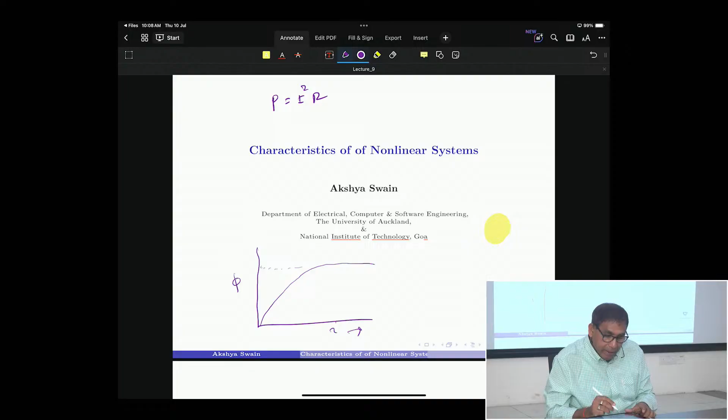Because if you operate within this zone, when the current is less than this, the system is linear. The moment you operate beyond that, then the nonlinearity sets in, right? So it all depends where your operating point is, how you are operating. That decides whether it will behave nonlinearly or linearly, right?

So the first point is important because academics see system is system. There is nothing like linear systems, nonlinear systems. It all depends on its behavior. Clear? Okay.

First point is your principle of superposition doesn't hold good, but with this constant, very standard questions we ask: y is equal to mx plus c. Y is equal to mx plus c. Linear or nonlinear?

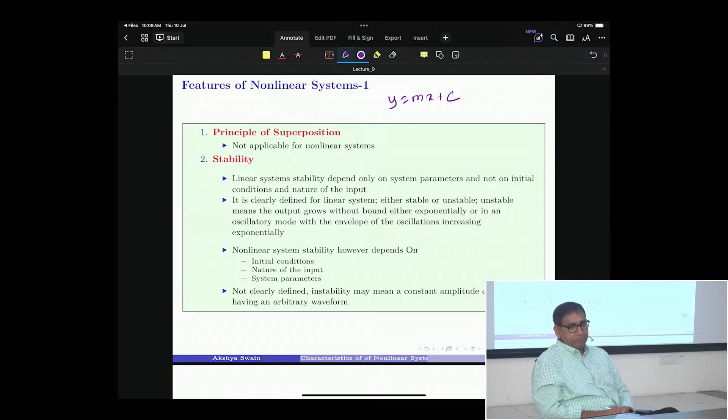Linear, right? Apply principle of superposition here. You apply principle of superposition here. For x1 it will give you y1 is equal to mx1 plus c. For x2, y2 is equal to mx2 plus c. Okay? Now x1 plus x2, what will it give?

Can you add them together? If you add them together, it will be m into x1 plus x2 plus 2c, right? Which is not equal to y1 plus y2. So the principle of superposition doesn't hold good for y equals mx plus c. Y equals mx plus c is not linear.

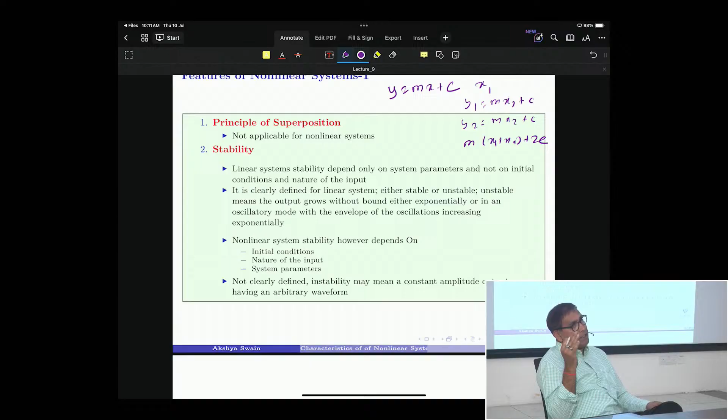It comes under the class of systems we will study tomorrow while dealing with the feedback linearizing controller, the affine class of systems. So mx plus c, remember, is a very standard academic question. Y equals mx plus c is non-linear, right? That is not important here.

Stability we will discuss in the next lecture, so I am not emphasizing it here. Linear system stability depends only on system parameters and not on initial conditions. But nonlinear system stability is different. We'll see that in the next lecture. Why waste time here? The important point is this point.

Point number 3 is the most important point, which is not being emphasized in the nonlinear literature. Energy transfer takes place at different frequencies, and that is a serious thing which I will tell you now. What is the meaning of that? The meaning is here, you see.

This is a square law nonlinearity, see here. You apply an input of sine omega t. The output will be a DC component and a 2 omega component. Do you see it? If you apply sine omega t here, there is a square law, so y(t) equals u squared(t), that equals a squared sine squared omega t, which equals a squared by 2 times 1 minus cosine 2 omega t. What is the frequency of that component, y(t)? One DC component and one 2 omega component. Do you understand that?

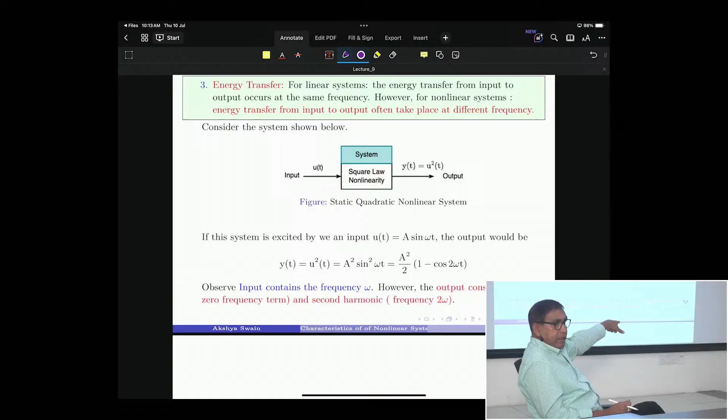See here, this term has a squared by 2 into 1 minus cosine 2 omega t. What are the frequencies? One is constant, the other is 2 omega, right? 0 and 2 omega. What is the input frequency? Input frequency is omega. The output frequencies are 0 and 2 omega. Square law, right? So energy transfer takes place at a different frequency.

What is the meaning of that? If it's a linear system, I will elaborate this point shortly. If it's a linear system, you apply A sin omega t, you will get some magnitude, doesn't matter, B sin omega t plus or minus phi. If omega is the input, you will get omega out, right? Nonlinear systems, no. Nonlinear systems, you apply omega, you may get a different frequency component, depending on the nature of the nonlinearity, right?

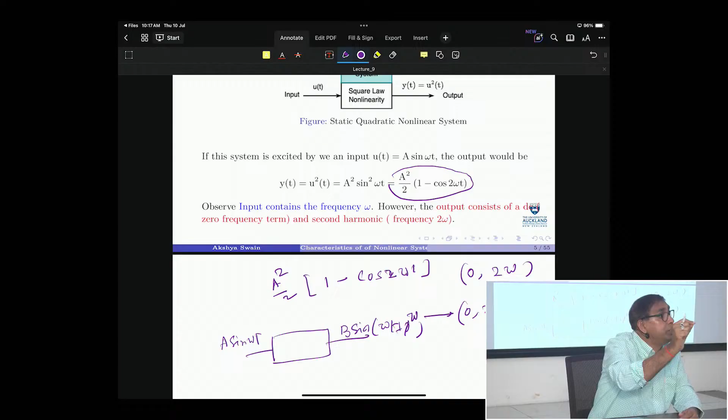So usually you will find, if people are working on motor control, see here, like this. Suppose there is a cascade system, this is one system here, this is another system, system 2, and this is another system, system 3.

I'm just giving an example. This example is very important. Suppose you know the resonant frequency of this one, this one, and this one. If you know the resonant frequency, what will you do? You will not excite the system at that frequency, right? Clear?

Now the problem is you do not know which type of nonlinear element is there in those systems. Suppose the resonant frequency here is omega 1, here it is omega 2, and here it is omega 3. I know it, so what I will do is not apply any input having frequency omega 1, omega 2, or omega 3. So I apply a signal of frequency omega 4. If I apply a signal of omega 4, it does not coincide, it will not resonate, clear?

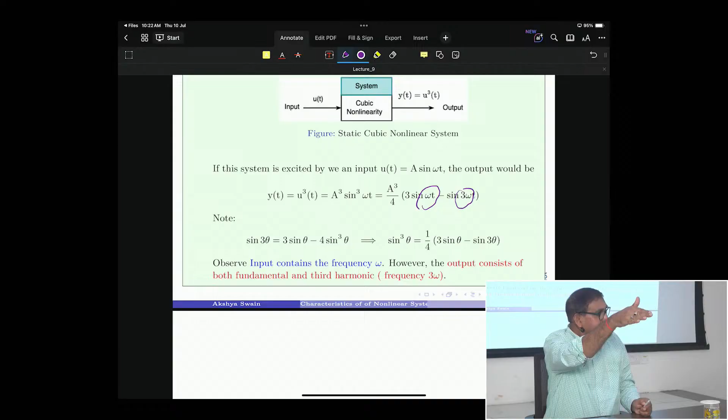I give an example. In Odisha, there is a Paradip port. So the question came in a school examination: which day does Independence Day come? One student wrote August 15th, 15th in Odia is Pandar, so he wrote August Pandar, meaning 15. Another student copied it, but Pandar is not a term, he heard Pandar as Bandar, meaning port, so he wrote your Independence Day is August Bandar. The third person said, how can August be Bandar? It is Paradip Bandar, so now Independence Day is Paradip Bandar. You got the point? How energy transfer takes place at different frequency and it changes.

This is a typical characteristic of the system, and you must be very careful about these things.

Interchanging the cascading elements: in linear systems, if there is a cascading connection, you can interchange G1, G2 to G2, G1. But this is not the case with a nonlinear system, you cannot just interchange this to that. Okay, this is not very important, but I will tell you.

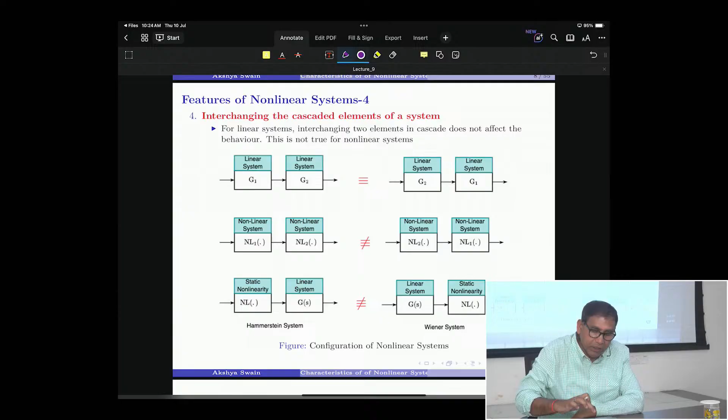Number 5 we will discuss after some time.

Multiple isolated equilibrium points, I will discuss in today's lecture. A nonlinear system, linear system has got only one equilibrium point. Remember, linear systems, no matter how complex, has got only one equilibrium point. Linear systems cannot have multiple equilibrium points.

Nonlinear systems can have multiple equilibrium points. Not that it always has multiple equilibrium points, but it can have multiple isolated equilibrium points. A nonlinear system can have more than one isolated equilibrium point. I am not saying that nonlinear systems have multiple equilibrium points - they can have. There are nonlinear systems which have only one equilibrium point, but most nonlinear systems have multiple equilibrium points. I will tell you what happens to these things later on, today itself.

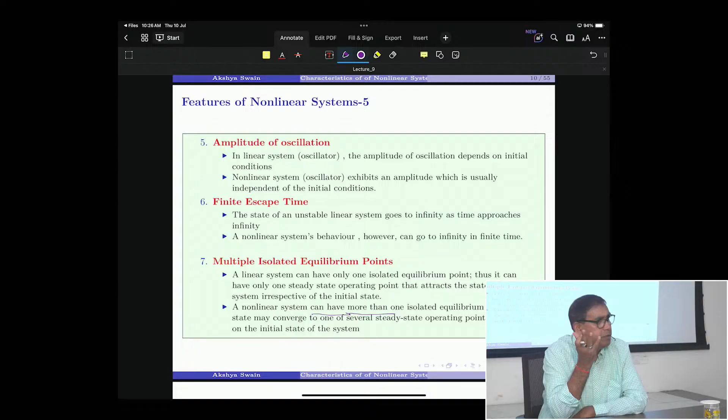Finite escape time means it can go to infinity within finite time, whereas linear systems will go to infinity in infinite time, but that has no real meaning. That point is an academic discussion, because infinity is the 5 time constants I told you - engineering infinity. So, multiple isolated equilibrium points: linear systems have one equilibrium point, and nonlinear systems can have multiple equilibrium points.

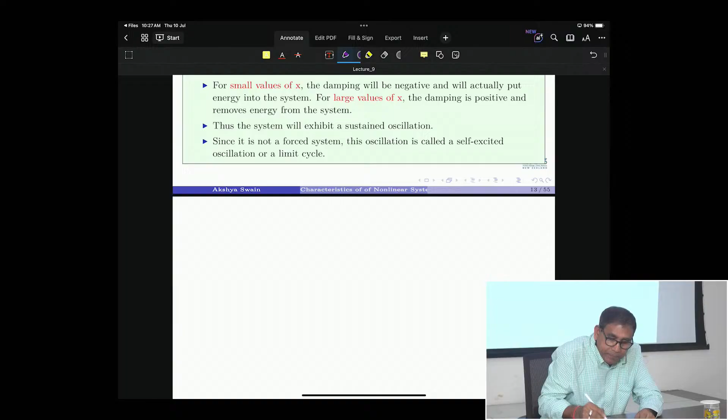Limit cycle oscillation - this is important. Let us first understand why oscillations occur. Unless that understanding is clear, you cannot understand anything. Why do oscillations occur? Remember, for oscillations to occur, no matter the linear system or any system, there must be exchange of energy. There must be exchange of energy for oscillations to occur.

This is an LC circuit. Now, if you inject certain amount of energy either to the capacitor or to the inductor, and leave it free - there is no input here, no voltage applied, just an impulse input injecting some energy, and leave it - there is no resistance here, so what will happen? The magnetic energy stored in the magnetic field of the inductor will be transferred to the capacitor's electric field, and because there is no loss, no resistance, it will again transfer to the inductor. This continues.

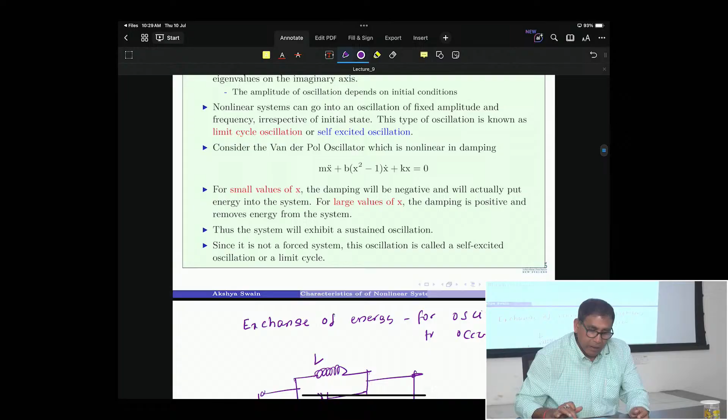Limit cycle oscillations - this oscillation is a bit different. To understand oscillations, I will tell you one thing which I tell in a different context. But this is India, I can utter these words here because you can understand - a typical example of oscillations: friendship.

Who can become good friends? Chanakya has told these things, and it is exactly equal to oscillations here. There are 6 characteristics. First is dodate pratighunnati: two people will be friends if you give something and he also gives something - you give him a present or gift on his birthday, and he also gives you a present. That is exchange - I give, you give. Second, guhyamakhyati puchyati: you tell your secret to him and he also shares his secret - then only you can become friends. Not that you tell your secret and he says nothing - friendship will not last. Third, bhukte bhojayate chaiva: you ask him to a restaurant for dinner and he also calls you for dinner - you treat him, he treats you. These 6 characteristics are a clear example of exchange - you exchange.

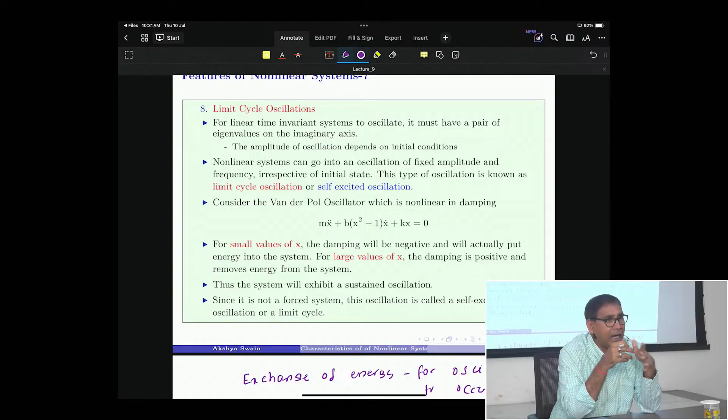Now first let us see what is happening, then I will come back again. Dampers - damper windings, dampers in vehicles. Suppose you drive in a good car versus a low variety car, you feel not comfortable. Why is that? Because the spring and damper are not of good quality, so damping is there. Now let us see this equation first.

M x double dot plus b times (x square minus 1) times x dot plus kx equals 0. Let us see this equation, then discuss all these things. What is damping? The usual equation is m x double dot plus b x dot plus kx equals 0. The coefficient of x dot is the damping term - here it is b. In our equation, the coefficient of x dot is b times (x square minus 1). So damping usually takes out energy - it takes out energy.

Now suppose x, the displacement, is less than 1. What will happen? X square minus 1 is negative, so that means negative damping. If x is less than 1, b into x square minus 1 is less than 0, right? Damping is negative. Usually damping is positive, but here instead of taking out energy, it will put energy into the system.

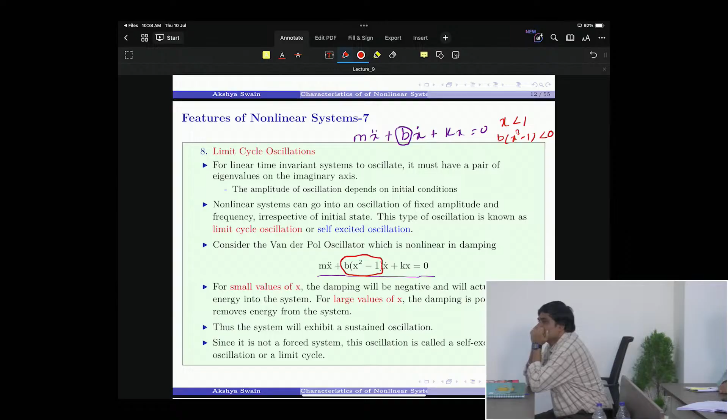It will put energy into the system. So the moment energy is put into the system, the amplitude of oscillation, the displacement, will increase. Now once it increases beyond 1, it becomes positive, so it will start taking out the energy. So sometimes you put energy in, and x increases, then after it increases, it takes out energy. So over a particular period, sometimes it is positive, sometimes it is negative.

So the effective damping will be 0. Let me tell you, what is the damping here? LC circuit, what is the damping? Damping is provided by resistance. Is there any resistance here? Damping is equal to 0, system oscillates.

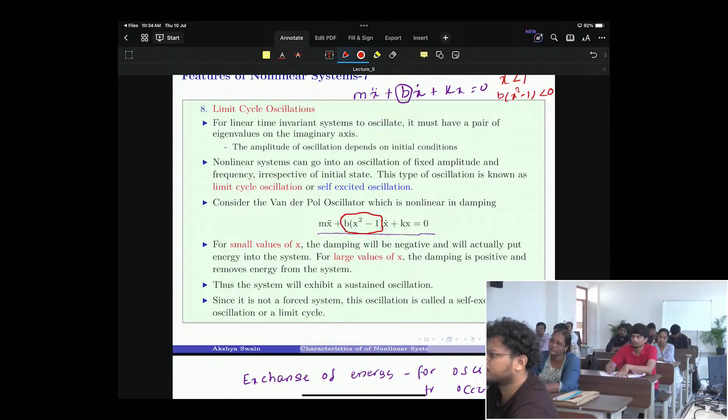Now here, things are different. Sometimes the damping is positive, sometimes the damping is negative, but the effective damping is 0. So it will oscillate. But that's the difference. Damping is 0 gives pure oscillations. Effective damping is 0 gives limit cycle oscillations.

Why that difference? Consider this: you do not earn any money, you do not spend, your bank balance is 0. Case number 1. But another case: you earn 1 lakh and also spend 1 lakh, and your bank balance is also 0. From a bank balance perspective, a person who doesn't earn anything has bank balance 0. Another person earns 1 lakh, spends 1 lakh, his bank balance is also 0.

These two people are the same from a balance perspective, but one is a beggar, another is a scoundrel who doesn't know how to manage his finances. Two things are completely different. Limit cycle oscillation is like that: effective damping is 0, effective saving is 0, but here saving is actually 0.

And another thing: is there an input in this equation? M x double dot plus b times x square minus 1 times x dot plus k x equals 0. There is no input. It's self-excited.

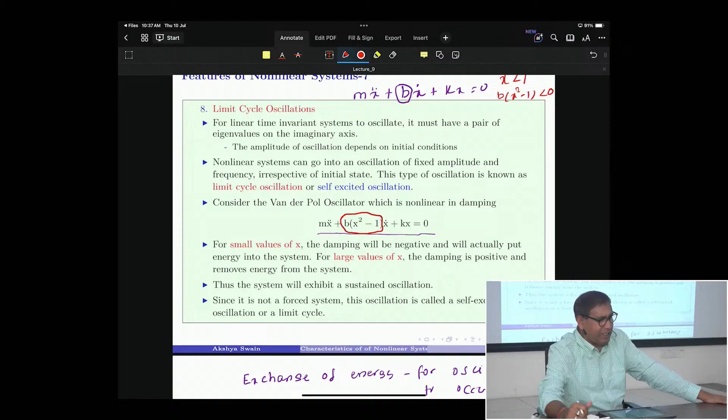With different types of dress, a hippie type of dress, he would just be talking to himself. Just talking. Self-excited oscillations, nobody is there. It would be around 4 o'clock or 3:30, I usually leave the university at that time, and he would be talking. I always give this example to students. I told her I parked my car on Mount Eden Road and I found a person on Kid Street coming and talking like this.

Self-excited oscillations, like limit cycle oscillations, got the point? So limit cycle oscillation is a very important phenomenon, and it occurs in nonlinear systems. The characteristic is it is self-excited, no input is necessary. First point: no input necessary for the oscillations. Second point: the effective damping is 0, sometimes damping is positive, sometimes damping is negative.

Clear? Very important phenomenon, limit cycle oscillations, and it's different from common oscillations in linear systems. An LC circuit also oscillates, but that's different, we'll see that today itself. No, you cannot say that directly, we have to determine it by different ways. There are standard ways you can determine it; otherwise analytically you cannot determine the frequency of oscillations. We'll come to that point and see how it works. Chaos.

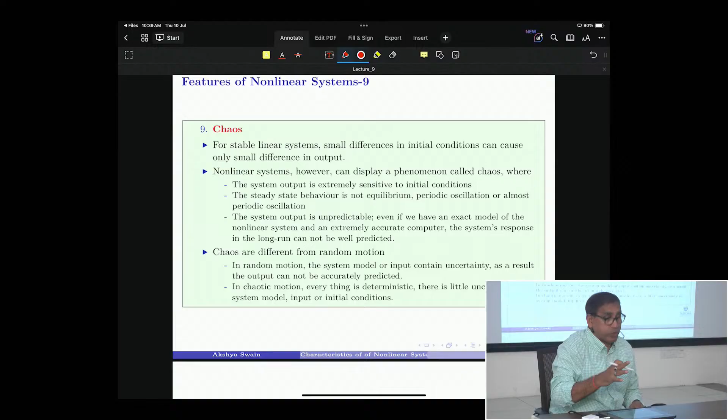Chaos. If this is the nonlinear system space, the entire system space is nonlinear, chaotic systems will be this much - a very small percentage of nonlinear systems behave chaotic. Very common thing. We have seen it with PhD students. You ask them to perform an experiment, and they will get some results and they will come to you.

One of my students, Leron, was working on mechanical engineering, he is now in Melbourne. Leron was working on some rotary inverted pendulum. One day he came to me and said, Dr. Swain, I think my system is chaotic. I looked at him, what are you saying, Leron? How do you know it is chaotic? He said, the response is looking such, it is chaotic.

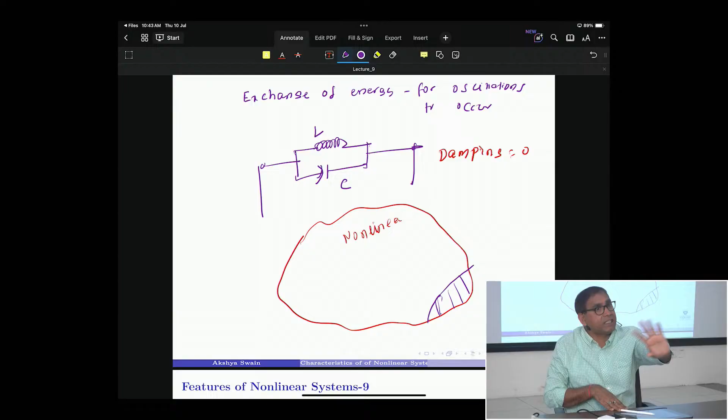Next day morning, you started doing it, you execute it. I am an onlooker, I am outside, so I will say, what is up? That is chaos. Appears to be random, but completely deterministic - who is going to do what has been planned before. He is not going to push the door, you will do it. All the tasks have been assigned. So I say a chaotic system, that's the order in chaos.

Order, got my point? That's the order in chaos. There is an order. So the student says it appears to be random - no, first find the order. Chaotic systems, and always remember, chaotic systems are not random systems. It appears to be random, it is not random, it is completely deterministic. You can determine everything. Random phenomena you cannot determine. So chaotic systems are a bit different, it's a serious thing. Appears to be random, but completely deterministic, that's the order in the chaos.

Another characteristic is extremely sensitive to initial conditions. Got a point? A slight change, a very minute change - we call it the butterfly effect, I am not explaining that in detail. It's a minute change, the example given is the butterfly effect: that is in the Amazon belt, if a butterfly affects the wing velocity, that will cause a storm in the Indian Ocean. Extremely sensitive to initial conditions, right?

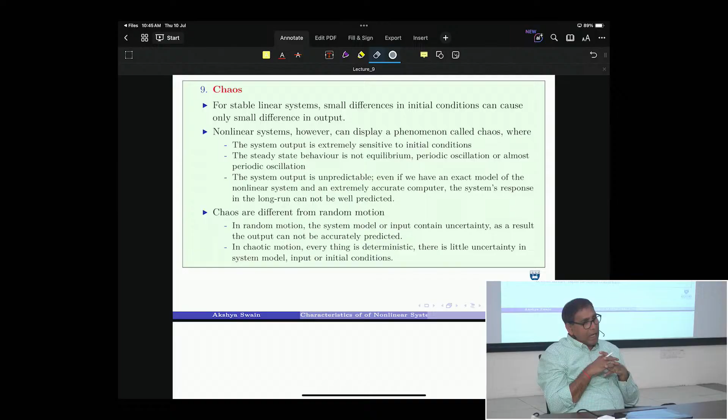But the important point is, chaotic systems appear to be random, but it is deterministic. Another thing is long-term prediction is not possible. It is deterministic - what is deterministic? The system whose behavior can be predicted precisely, that is a deterministic system. A random system, you cannot. Here prediction is possible, no doubt about that, but long-term prediction is not possible. I'll give an example here. Long-term prediction is not possible, short-term prediction is possible.

Weather forecast, that model is chaotic. Short-term prediction is possible. Suppose I predict tomorrow's weather, it will be correct. Day after tomorrow, a little wrong. Still a day after, it will be almost wrong, right? So long-term prediction is not possible, short-term prediction is possible, because the model is chaotic.

Another point which we are not discussing here: chaotic systems require a little bit of different mathematics. One is fractal geometry. Have you heard the term fractal geometry? Yeah, Mandelbrot said, fractal geometry.

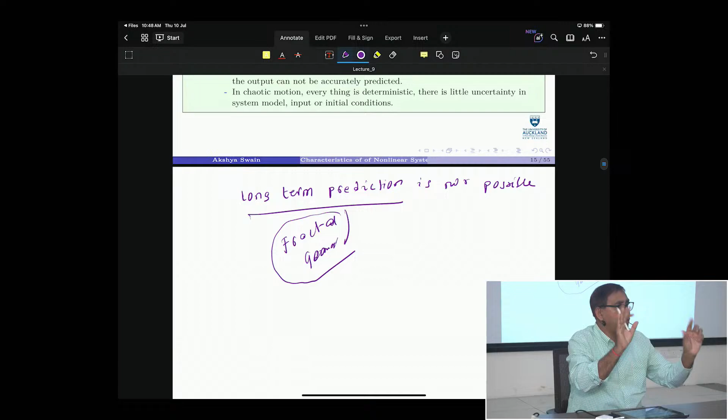I am just giving one example here. Suppose I have a piece of paper. What is the dimension? 2. Now I make holes on the paper, a few holes. What is the dimension? Still 2, same. So a paper without any hole and a paper with some holes are the same? They are not the same. So how do we distinguish this paper from that paper? Euclidean dimension cannot do it. So we have to calculate some fractal dimensions.

Say, for example, bread. You get different types of breads, right? So when these breads are produced, you can calculate the fractal dimensions of different breads. Then you will find which breads have lots of porous things in them, right? So fractal dimension will distinguish these things. I'll show you something today itself. So fractal geometry is being used to characterize some of the chaotic attractors.

Important point to take before I proceed further: multiple isolated equilibrium points, energy transport takes place at different frequencies, limit cycle oscillations, and chaos. Let's go further.

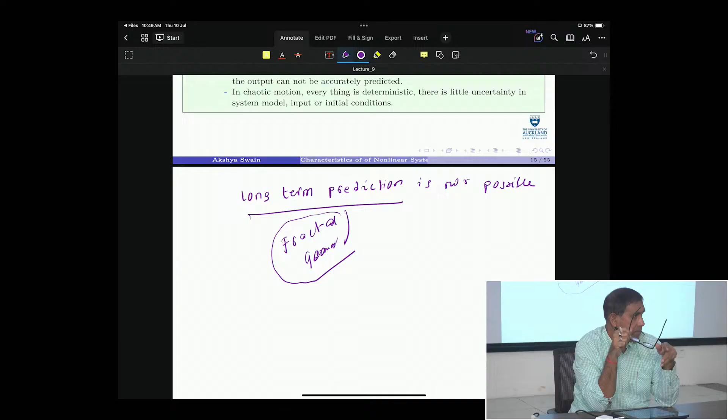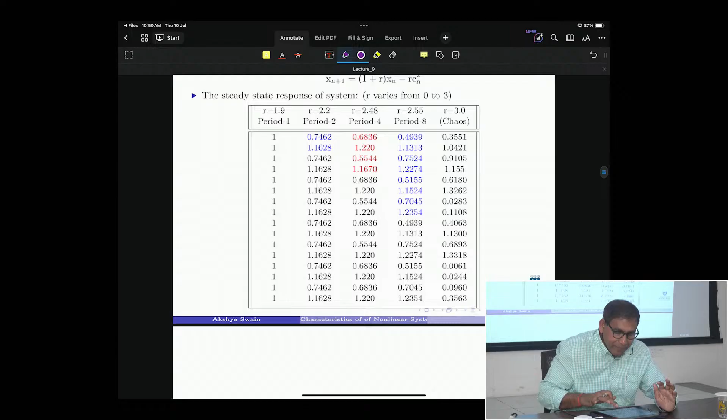Let me show you. See this equation, if this parameter R I am changing, just see the table. If R is equal to 1.9, the output is always 1, 1, 1, 1, 1, right? There is only a steady state value of 1.

The moment R changes to 2.2, now see how it looks: 0.7462, 1.1628, again 0.7462, 1.1628, again 0.7462, 1.162. So it is in steady state, but with two steady states, right? 0.7, 1.16, 0.7, 1.16, 0.7, 1.16. Period doubling bifurcation, that means two equilibrium points.

Now if R changes to 2.48, this pattern repeats again, you see. It repeats again. Got my point? Period 4 bifurcations. So it goes to those, it is not transient, it repeats at certain points.

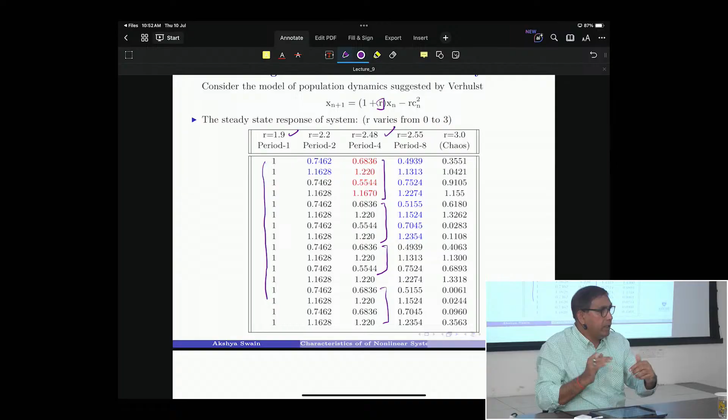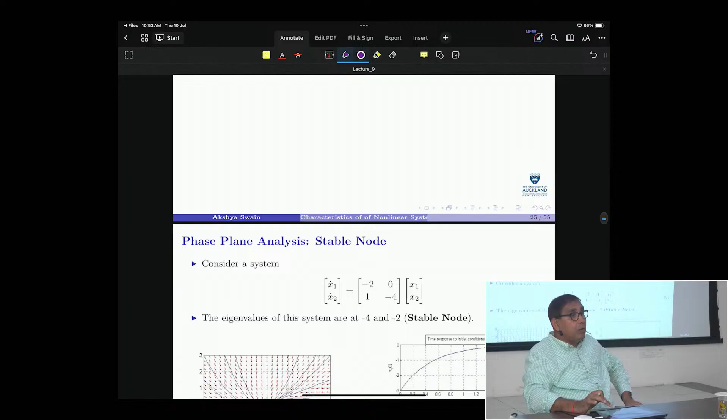How to analyze nonlinear systems? There are different methods to analyze. One of them is the phase plane method, which I am going to show you now. That particular method is only applicable for analyzing second order nonlinear systems, because it is a phase plane method. Plane means 2 dimension, it cannot be more than 2 dimensions.

So you take a nonlinear system, any second order system. How many state variables will there be? Two. So you just plot those, you get the response, you plot between x1 and x2, and see how it behaves, right?

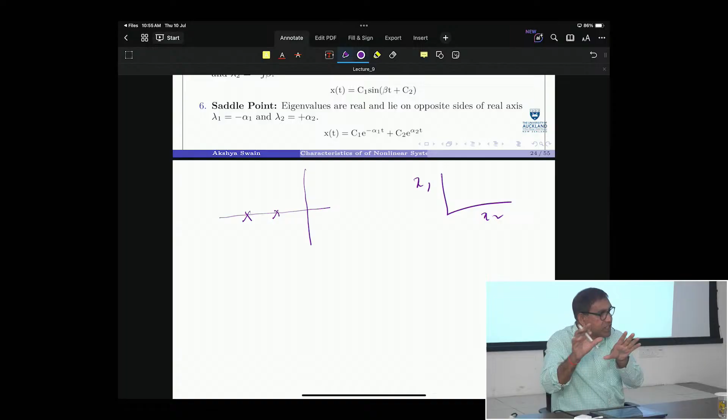For a linear second order system, if the poles are here on the real axis, and if you plot the phase plot, meaning you plot x1 versus x2 - not a time plot, remember, not a time plot. You get x1 versus time, x2 versus time, but instead you give the command to plot x2, x1, no time. Then you will find in the x1-x2 plane, or x2-x1 plane, it doesn't matter, it looks like this.

Depending on the initial conditions, the plot will look like this. So you take a nonlinear system, get the response using ODE45, and plot it. If it is like this, that means the system is stable, right?

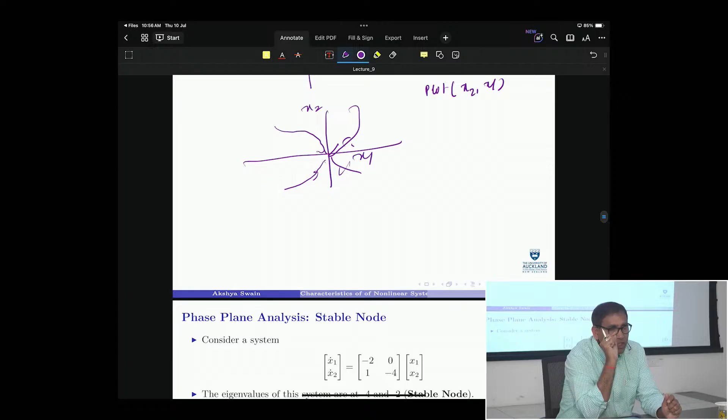If the system has got complex conjugate eigenvalues - this is one of the important points - the phase plane portrait looks like this.

No, you're not getting it. Just bear with me. You have got a nonlinear system, you want to analyze its behavior, right? So what you do, you go to the computer, you get the response x1, x2. You get x1 versus time, x2 versus time, but don't plot x1 versus time and x2 versus time separately. You get x1 and x2, then plot x1 versus x2, right?

If the system has poles in the complex conjugate negative plane, the phase plane portrait looks like this. Unless you know from a known thing, how can you interpret it? I will show you - this is a phase plane portrait. Suppose somebody shows me this, then I will say it is a damped oscillatory system. The oscillation amplitude is gradually coming down, finally becoming zero.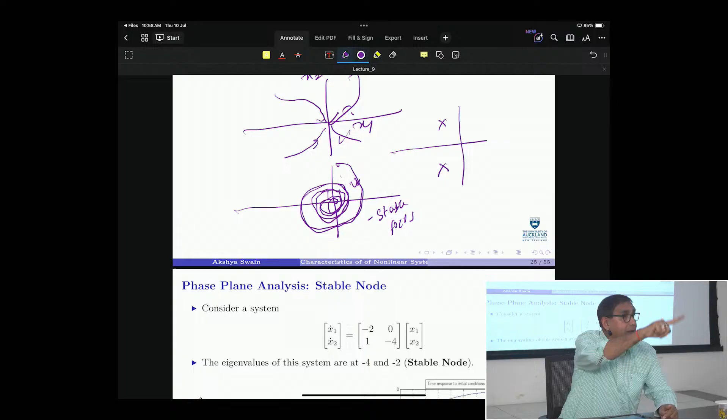Just like you must know how a good person behaves, how a bad person behaves, how a criminal behaves, right? If you know it, then I will show you the behavior of this system - a person looks like this, then you know this matches with an idiot, so that person is idiot. Similarly, if there is a complex conjugate eigenvalue, the phase plane portrait is a spiral, a decreasing spiral.

I understand, I understand, I got your point, very good question. This is the system, a linear system. Now here also, if you plot the phase plane portrait, it will look like this, right?

Another system, it is here, right? Here also it will look like this, but how do you know the difference? You see, it is coming down, coming down, coming down, right? So it will quickly come down. Many spirals - what happened? From that you can know it.

Whether damping is more or less. Damping is more means away from the imaginary axis, sigma. Damping is less means closer, right? So from that you can know. This one is just decreasing.

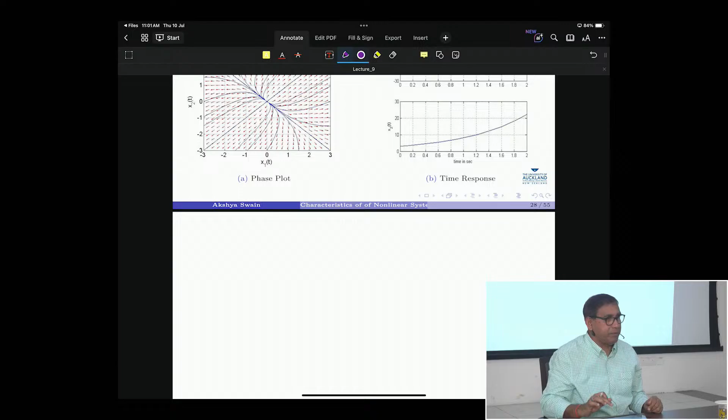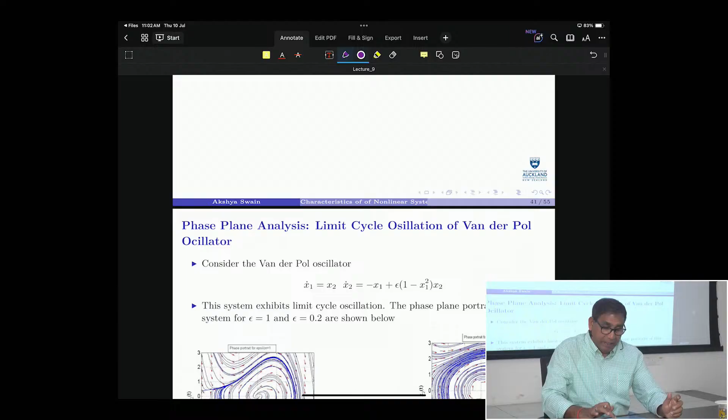Now, saddle point. Saddle point means one side is positive, another side negative, so it's unstable. This point is important. Now see the difference - this is the Van der Pol oscillator.

This system exhibits limit cycle oscillations, right? Any oscillation means a closed curve. Now see the closed curve here - it is not circular, is it? This is some different shape, right? So it is a limit cycle oscillation.

And another point is, isolated closed curve is a limit cycle. What is the meaning of isolated? Isolated means if there are poles here, then in the phase plane portrait, for a particular initial condition, you simulate it with some initial conditions, you will get this one, right?

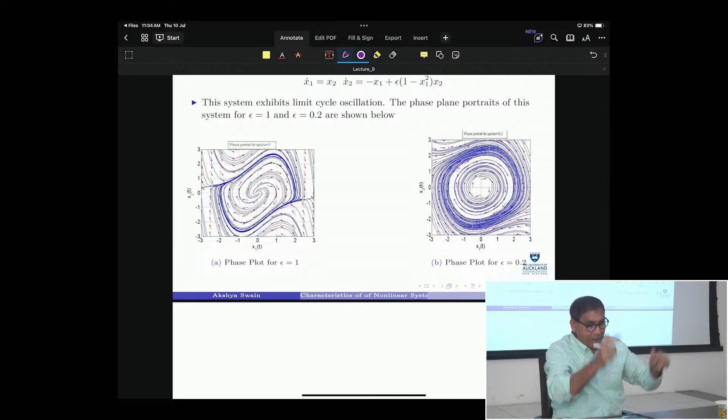You change the initial conditions a little higher, you will get another circle like this. You change the initial conditions to another value, you will get another circle, right? So these circles are not isolated - by changing the initial conditions, you get different circles. Whereas here, by changing the initial condition, no matter what you do, there is only one circle. You see, I'm drawing it here.

You start from this point, you come here. You start from this point, you change the initial conditions, you start from this point - it will not intersect, but I'm just showing here - it will again come to the same point. You start from this point, again it will come to this point. Not isolated - this is isolated. It's not closed, right? Only one closed curve in the phase plane portrait, right?

11.5, I will take only 5 minutes to talk about the basin of attraction, then I will leave.

Analysis part - see here, the interesting thing. Nonlinear systems, this is a very interesting phenomenon - nonlinear systems can have multiple isolated equilibrium points, right? If a system has got multiple isolated equilibrium points, where will it converge, where will it go? Because with equilibrium points, if you have got 3 houses - one is Panaji, another is near the airport, and another is in the NIT campus - if you have got one house, then you can come to that house only. If you have got multiple houses, where will you go? This particular system has got 3 equilibrium points. Okay, I will explain this diagram.

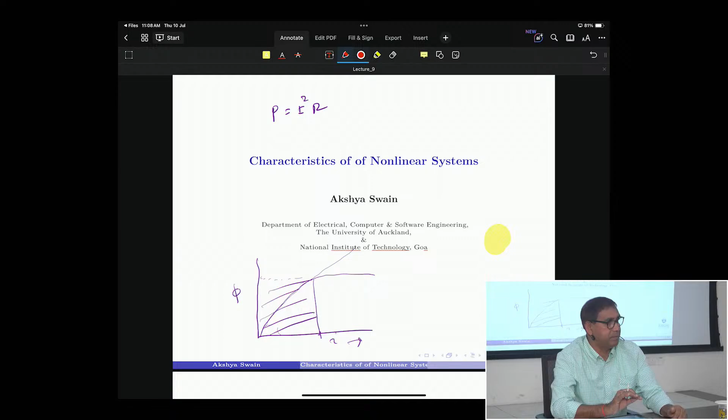So in chaotic systems, when you analyze, we always calculate the basin of attraction. It has to be done numerically, not analytically - it's difficult. Okay, it's not difficult. You see, I have calculated these things. I don't know whether I've given the program to you, but if it's there, I can pass it to you. I'm showing you the basin of attraction here. You see, just a minute - here, see, basin of attraction.

2 pi 0 minus 2 pi 0, you see, I've done it, this is 0, 0, minus 2 pi 0, plus 2 pi 0.

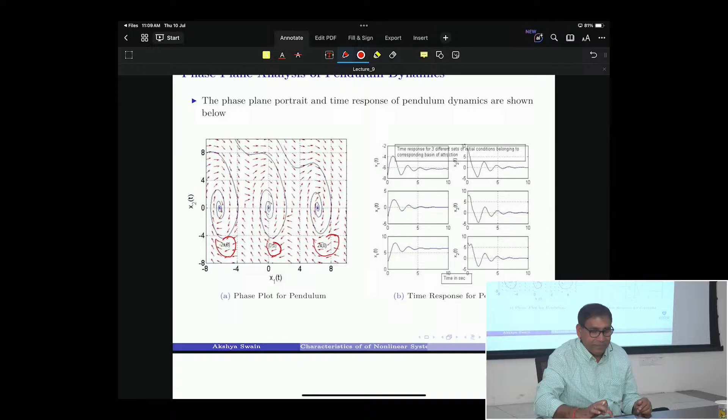But that is not the point. The question is basin of attraction. If it operates in this zone, it will be attracted to that. If it operates in this zone, it will go here. If it operates in this zone, it will go there. Basin of attraction is extremely important. It has to be done numerically, not analytically. You have to find out the basin of attraction.

These things I did 20 years back on my computer. I did not take all the initial conditions, I took some initial conditions. It took 2-3 hours on my computer during that time. It takes time, but for each initial condition I will spread and find out where it is going. Otherwise we can find out. So this is because of that.

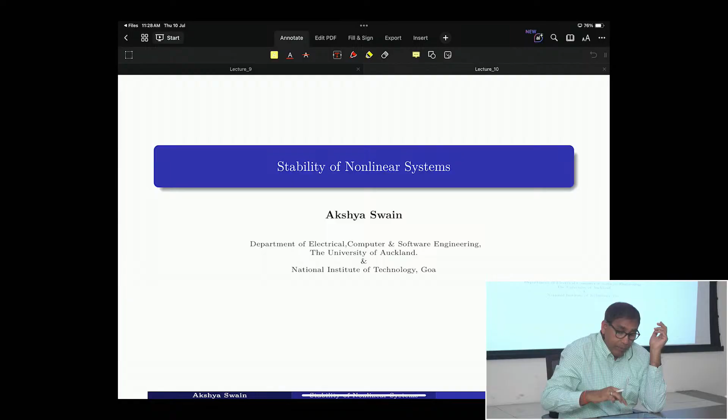Got the point? These diagrams you all know, so I'm just doing it for completeness. This is asymptotically stable. This is unstable. This is Lyapunov stable or neutrally stable - if you just give the perturbation, it will go nearby and stay there, it will neither diverge nor converge.

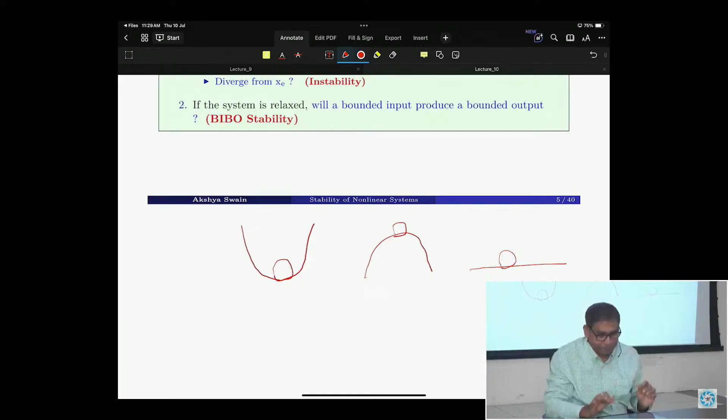How to study the stability of a linear system? A linear system has got only one equilibrium point. And that is stable if all the eigenvalues are in the left half plane. Left half plane poles, system is stable. Right half plane poles, system is unstable. Imaginary axis poles, marginally stable, actually unstable.

Marginally stable is an academic thing, an academic job. There's no marginal stability in practice. Nobody will put you on the cliff of a mountain and say you are marginally stable there. No, no, no, that is practically unstable. So we say practically marginal stability does not exist. We cannot take the risk of asking people to stand on the cliff because you are marginally stable. If something happens a little bit, you are gone.

So system is stable or unstable. Left half of the S-plane, system is stable; right half of the S-plane, system is unstable. Now the question is how to study the stability of a nonlinear system.

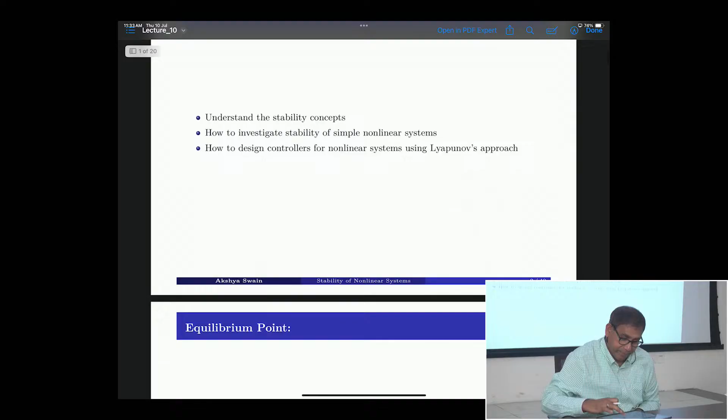See, why? One minute, where did it go? Which lecture is this? Lecture 12, 11, no? 11, no, lecture 10. Okay. Wait, is it coming? Yes. And compute the eigenvalues of the Jacobian. What is happening here? One minute, let me open it in PDF Expert.

Compute the eigenvalues of the Jacobian. Then if the eigenvalues are on the left half of the S-plane, the system is stable. Right half of the S-plane, the system is unstable. That is what people do in this analysis.

You may laugh. The system is nonlinear and people are using this linear analysis. At each equilibrium point they find the Jacobian, they linearize the system, then develop the controller. Does it have any basis? Is there any justification to do this? The answer is yes. What they are saying, they are not fools. They cannot be very genius, but they are not fools. It has all come from Lyapunov's theory.

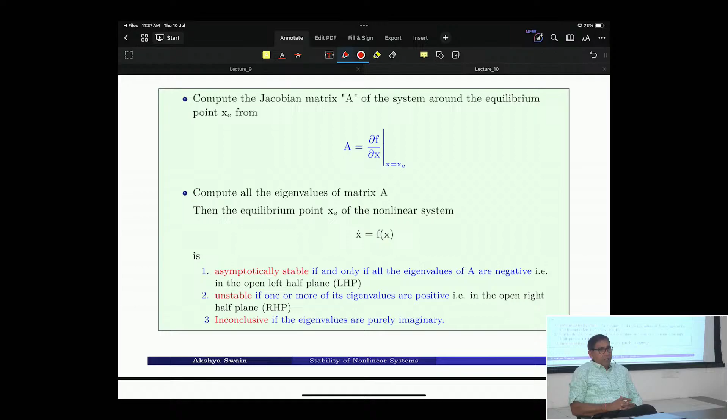This one, you perturb it, it will finally come to this point, right? Say for example, if I draw like this, if you are here, and you go and go and go and finally you will come again to this point. Okay? When I was a student, in class 8, there was a poem, I didn't find out actually now, that poem's name is The Quest.

I always give this example to explain asymptotic stability, The Quest. This poem was taught to us in class 8. I will tell you what it is. There is a mother and son, father is not there. They were living in a very nice house near the Miramar beach, in Goa, Panji. Very nice place. They were staying together, the mother and son.

Then one day the son told his mother, Mom, I don't want to live here, I am getting bored - very common term nowadays with youngsters. We are bored, what is this bloody boredness, I don't understand. Anyhow, the mother told, why are we bored, this is a very nice beach. No, I want to go and find a house, a quest. Then the mother finally said, okay, you go and find a house, then we will shift there, right?

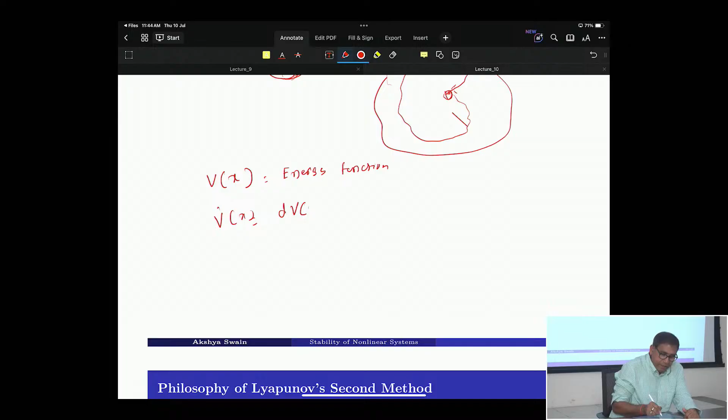Find V dot x. V dot x is the differentiation with respect to time. That is dVx over dx into dx over dt. That is equal to dVx over dx into x dot. Find V dot x. Get the energy function and differentiate it.

If it is negative, system is stable, asymptotically stable. If V dot x is less than 0, system is stable. V dot x is less than or equal to 0. If the equal to 0 is there, the system is Lyapunov stable, that is, it is not asymptotically stable.

So for that analogy I gave you, it is not coming to Miramar beach, it is going to nearby another beach. It is remaining close, it is not going out of this space. System is Lyapunov stable.

So you take a function Vx, differentiate the function and see whether it is negative. If it is negative, system is stable.

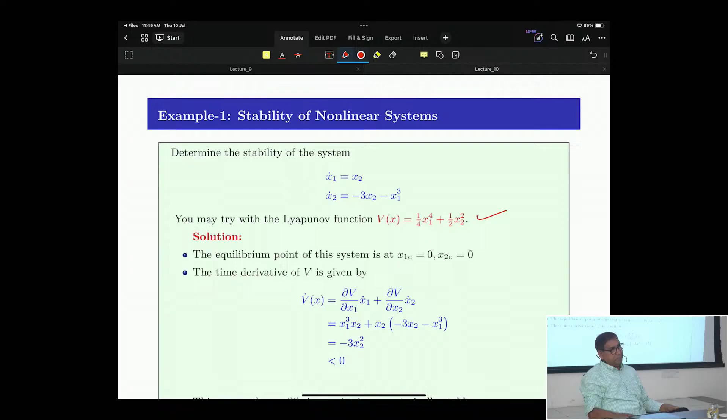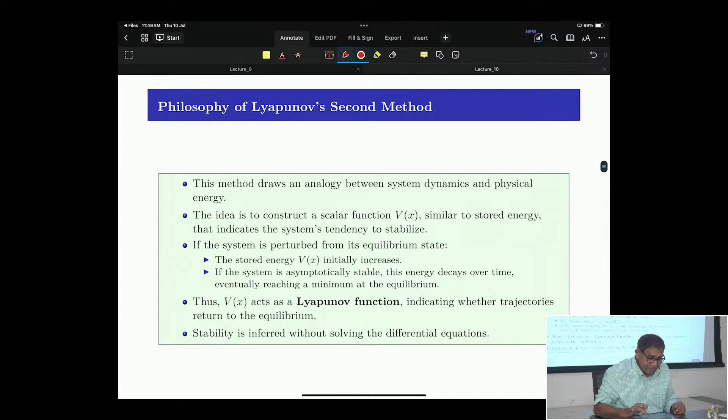Now, there is a catch here. What is the catch? You take a Lyapunov function, you differentiate it, then you check the sign of that function, whether it is less than 0 or it is not, right? Now, what do you check? You check V dot x is less than 0 or not. How to check it?

Simple system, you can check it. It's an inequality, not an equality. V dot x should be checked for negative definiteness, negative or 0, right? So you have to solve an inequality. V dot x is less than 0. How many solutions are there?

There are many solutions. Suppose I say find the value of x which is less than 5. How many solutions are there? Tell me. Infinite number of solutions, there are many, right?

Now, when there are many solutions, you have to find out the feasible solution. LMI feasibility, feasible solutions. I'll give the feasible solutions.

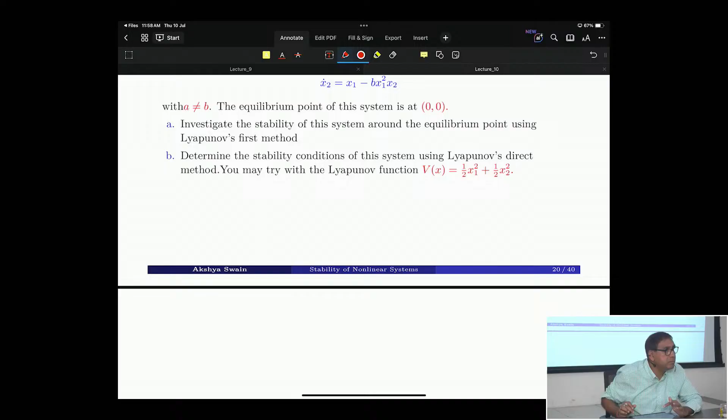No, the first method, you can always use the first method. You linearize the system, you find the Jacobian, then you find the eigenvalues. If the eigenvalues are in the left half of the S-plane, the system is stable, there is no need of finding Vx.

If the eigenvalues are on the j omega axis, then you have to resort to this particular formula. Good question.

I will not start with the first method. Those who are not control specialists should start with the first method, because you linearize the system and do it. Okay? Linearize the system and do it. Linearization of a system, which we will talk about tomorrow, the feasibility.

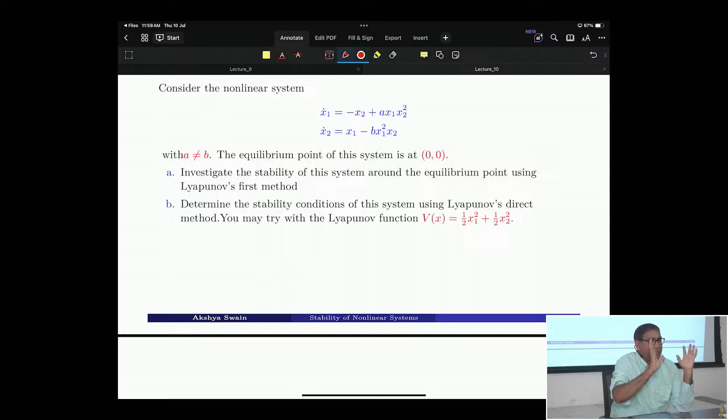Linearization, Jacobian linearization, this is just like our Indian government is working. Appeasement. Not only Indian government, throughout the world, appeasement politics. A person is an idiot, and instead of telling him he is an idiot or throwing him out, you tell him to behave a little bit, be within a certain range, you stay here. Okay?

But feedback linearization, and other types of techniques, whether it is linear or non-linear, remove it, completely remove it from the system. So Jacobian linearization is okay, no doubt about that. Now see here, I'm saying this example.

This example, is it? Now this example, I'm just showing the result.

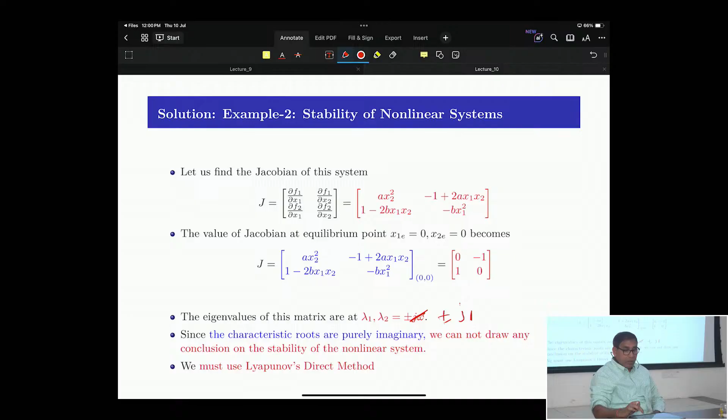This one is plus minus J1, not J0, that's a typo. Now here, this particular system, I found using the usual first method. I got the Jacobian, I got the eigenvalues of the system, and the system eigenvalues are plus minus J1. So now I cannot use the first method. So we use the other method.

And then we found out, okay, actually this particular line is also wrong. I just show it for the students, I do it, I should remove it. A minus B x1 square x2 square. So if A is less than B, system is stable. If A is greater than B, I have written it for the students' sake, actually I should not write it. Nothing can be done. If A is less than B, system is stable. That's all, full stop.

Lyapunov has got the stability criteria. Lyapunov did not give any instability criteria. Remember, Lyapunov gave stability criteria, but did not give any instability criteria. Under what condition, if V dot x is greater than 0, will the system be unstable? No, that criteria is not there. This line I wrote because students say that if V dot x is greater than 0, unstable, but this is not true.

The first principle: Lyapunov said you get a Lyapunov function and differentiate it, if negative, system is stable, full stop. If it is positive, nothing can be concluded. Now I'm giving an interesting point here. This system, I took a Lyapunov function, you see here, I took a Lyapunov function, this one, and took the derivative.

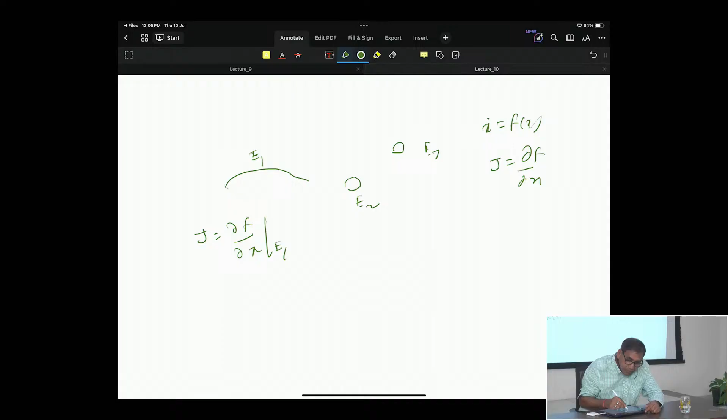Now very clear - the Jacobian matrix del F over del X at E1 will have eigenvalues where? Right half or left half? Right half, because this point is unstable. You see, this equilibrium point is unstable, yes or no? This equilibrium point is unstable. So if this equilibrium point is unstable, it is obvious - the Jacobian matrix here will have eigenvalues in the right half of the plane.

This, or the other equilibrium point here, where it went, I don't know. This equilibrium point, this equilibrium point, this equilibrium point - E1, E2, E3.

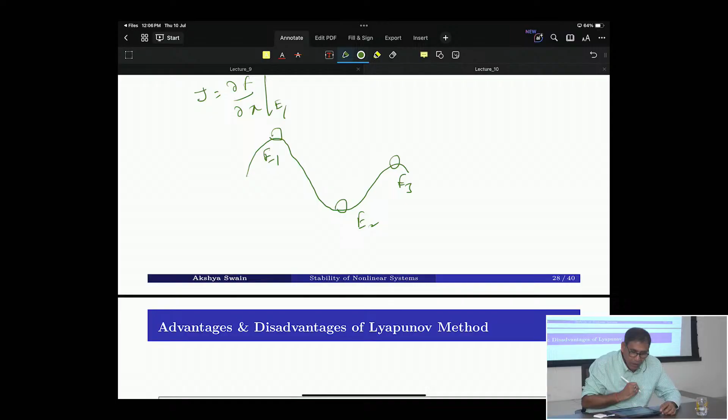E2, if you find the Jacobian matrix, is E2 stable or unstable? Stable. So for this Jacobian matrix, the eigenvalues will be in the left half. Whereas E3, eigenvalues will be in the right half. Right? So this is how people analyze it.

And this justifies - this particular theorem justifies the linearization analysis of nonlinear systems. If someone asks you why you are linearizing the system, you always cite the Lyapunov first method here, because that justifies this point.

Any questions on this? The problem is there is no method for how to find out the Lyapunov functions, but having said that, I'll tell you - usually we find out. There are many things that have been developed nowadays. Lyapunov functions - because for so many years, people have been working on that.

Linear matrix inequality, semi-definite programming, bilinear matrix inequality, sum of squares methods - these things have been developed in recent years to study the stability of the system, basically, essentially, using the Lyapunov method, right?

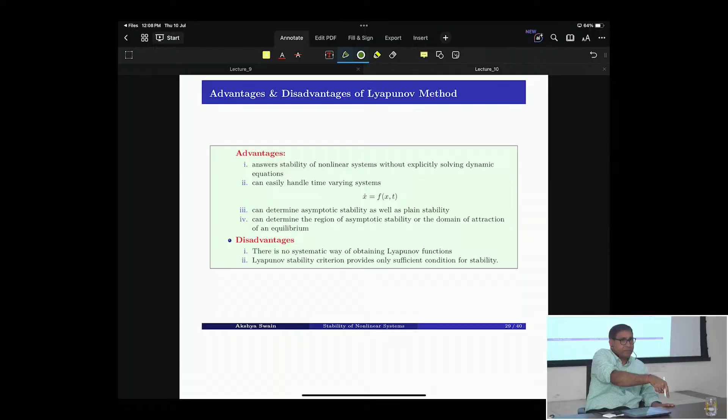I will tell you. A ship is safe in the harbor - no problem, a ship is safe in the harbor. But that doesn't mean the ship should not sail, because that is the purpose for which it has been built. So when you study Lyapunov stability, you say if the ship is within this harbor, it is stable.

That's fine, but what's the point? You take the ship a little away from the port and see whether it is stable or not. Still further - whether it is stable or not. Still further, you see, this is the point I am saying.

This is the space. Lyapunov stability is stable - is it stable here? Is it stable here? Is it stable here? Okay, don't make it conservative. If you are inside the house, no problem of any accident, but there is no purpose for which you are built, right? So that is conservative.

So while doing research, people will say, using this Lyapunov function, I found that if the system operates within this region, it is stable. Using another Lyapunov function, I found the system is stable here. So naturally this one is better - conservativeness, you know, it's not conservative, a little bit expanding.

No, that you have to do by trial and error. You see - just increase it, just increase it. Yeah, the region will change. Region will change.

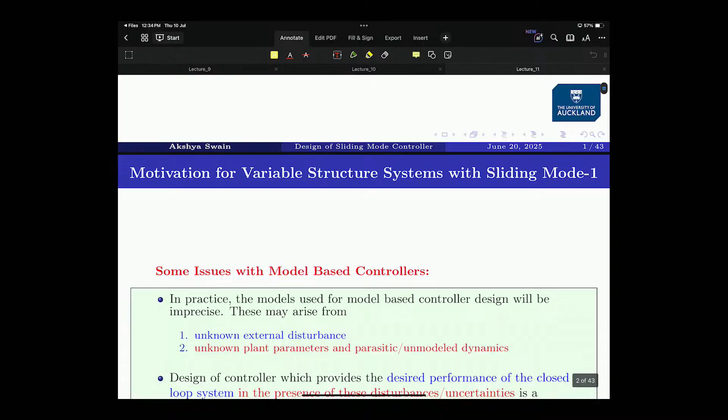Stabilizability of the linear systems. I can talk offline.

Controllers — sliding mode controller. All the controllers you are going to study in this course are very powerful controllers. Even our students are doing the same thing nowadays, SMC. I will come to the concept here, why you are using it. In practice, let's read it now, then we'll go.

In practice, the models used for model-based controller design will be imprecise. There will be some error in the modeling. This may arise from unknown external disturbance, unknown plant parameters, and parasitic unmodeled dynamics. Designing a controller which provides the desired performance of the closed-loop system in the presence of these disturbances is a challenging task. Models will always have some uncertainty, right?

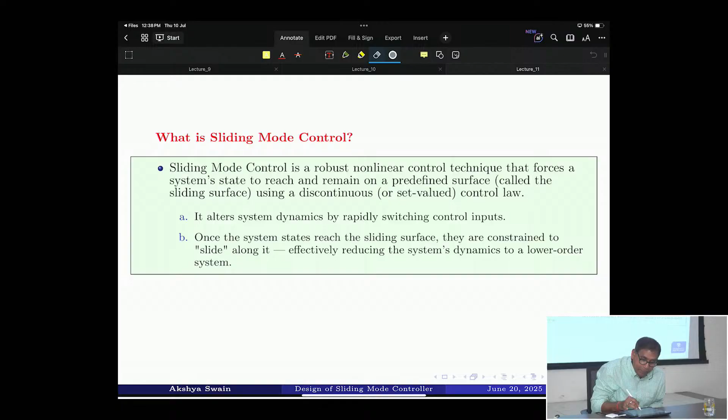Its system state has to reach and remain on the predefined surface. You cannot understand yet, I will give an analogy shortly, then things will be clear. Using a discontinuous control law.

Let us understand the concept of sliding mode control nicely with an analogy, then only mathematics will follow.

All of you, a few minutes before, were in the corridor, right? Creating sound, noise - all of you, including me. Then Professor Rahul Kaur thought, these people are idiots - as long as they remain in the corridor, they will create noise. Let us do one thing: push these idiots into this room. Push these people - that's exactly what we are going to do. Not in the corridor, push these people into this room, and he knows the moment we are in this room, we cannot go anywhere. Clear?

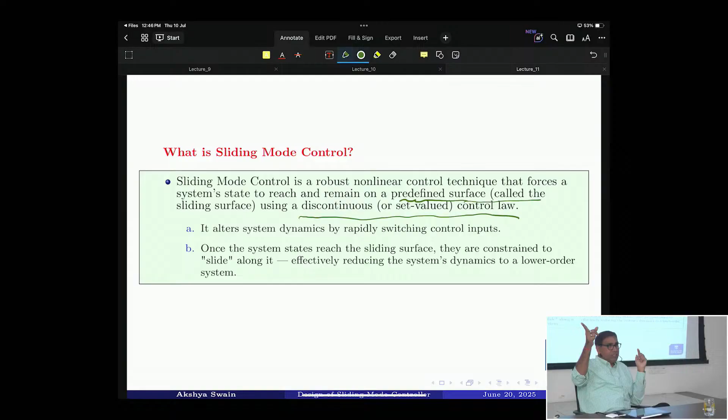Yeah, sliding surface. But sliding surface design is up to you - that's the design criteria. Whether it will reach there or not depends on the system conditions. There are conditions, got the point? Sliding surface you can design, but whether you can reach there or not, that depends.

Step 1: design the sliding surface. Where will you put it? Whether in the beach, the hotels, or the cinema hall - what is the sliding surface? Because that is where you will slide. Design the sliding surface, sigma(x) equals zero, where x is the state variable. Define the sliding surface that the system trajectory will reach and stay on. This surface shapes the desired closed loop dynamics - what you want, that will be there.

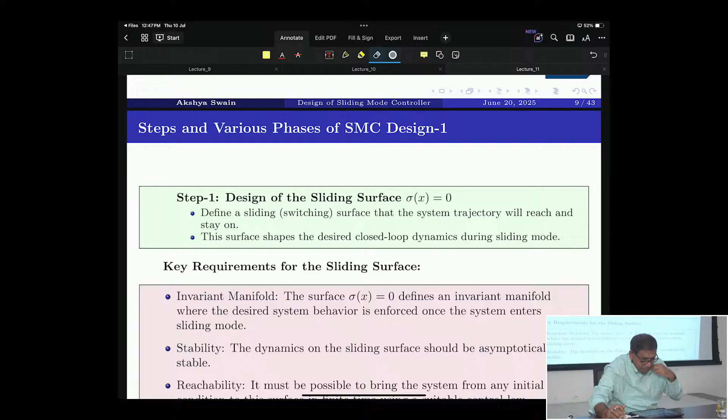Now, the dynamics on the sliding surface should be asymptotically stable, okay? And it should be reachable. Just like I told you, Mars - you cannot reach Mars, okay? So the system must be stable on the sliding surface. This is the condition.

And that's the reachability - you should reach there. Okay, that's fine, reachable - you should be able to reach there, right? Suppose you say, I want my sliding surface in the sun. You are not Lord Hanuman that you can reach there. It's not reachable - the condition is not satisfied, right?

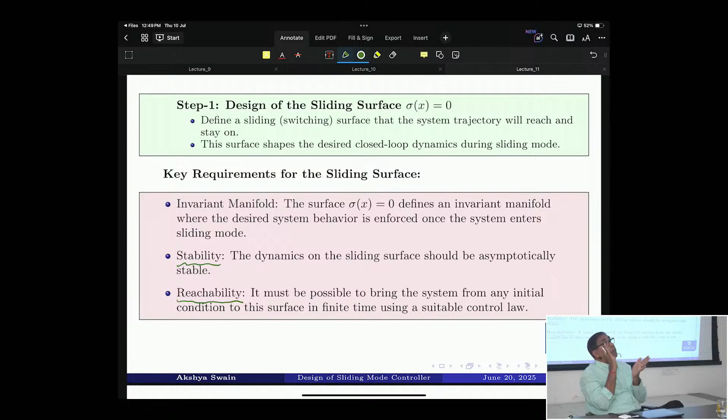So these are the conditions: stability - it should be stable, and it should be reachable. Because remember, once you are on the sliding surface, all problems are over - the modeling uncertainty, everything - the system will be robust.

No input constraints - I understand what you say. No input constraints, no, no input constraints. That's a good thing, yeah.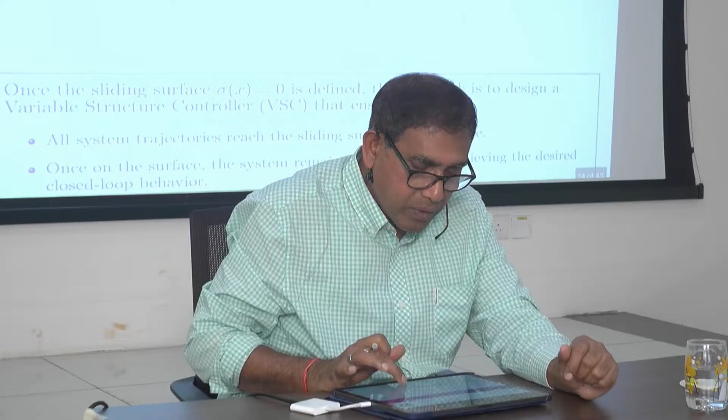Once the sliding surface is defined, the next task is to design a variable structure controller that ensures all system trajectories reach the sliding surface in finite time. Once on the surface, the system remains confined to it - that we have to see.

Now, the variable structure controller is a wider concept - the sliding mode controller is a subset of the variable structure controller. I am coming to that point. Sliding mode controller is also a variable structure controller, but a variable structure controller is not necessarily a sliding mode controller - the structure of the controller is variable. I will explain what that is.

I will give you an analogy. Have you seen the young people or the elder people playing with the children?

Suppose you play hide and seek, and you ask a child to catch hold of you. So what you did, you move. The child is the controller, or you are the controller, so the child is following you. Now suddenly you make a change. The moment you suddenly make the change, there is no finite trajectory. He doesn't know which trajectory he will take.

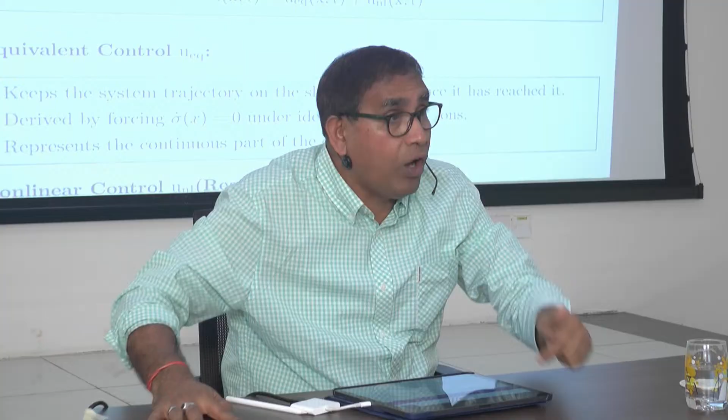Okay, so I know that if you are coming to this room, you are safe. So you are in the hostel. I know that you are coming to this place, you are safe. So I am making a control law which will bring you from the hostel to this place. The problem is, you must come from the hostel to this place. In between, there is no guarantee what will happen.

So the reaching phase should be as quick as possible, because in the reaching phase, there might be some problem. We cannot ensure anything. Suppose you are coming from the hostel, you are safe here, but while coming by bus, you don't know whether the bus will break down or something. That guarantee I cannot take. In the reaching phase, when the system is coming from that initial state to the sliding surface, there's no guarantee.

So we say finite time convergence to the sliding surface, and that time should be as quick as possible, because there's no robustness, nothing is guaranteed. Just like an insurance policy: if you do the insurance policy from tomorrow, insurance will take care, but from today until tomorrow, insurance is not going to take care. No insurance says that your insurance is from tomorrow.

If you are in a sliding surface, I will take care. How to come to the sliding surface, that is your job. Got my point? No.

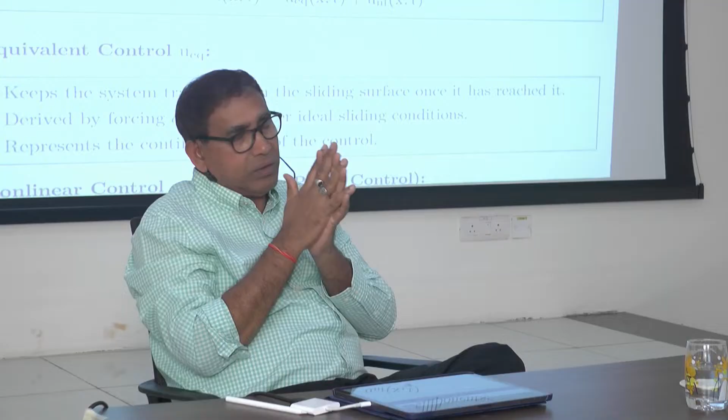No, that we are coming to that. That depends, but always the reaching condition is not satisfied. You can design any sliding law, sigma x equal to 0. The reaching condition says sigma x into sigma dot x should be less than 0, and sigma dot x depends on the system dynamics. You may not reach there.

The control input in the sliding mode controller essentially consists of two things. One is called the equivalent controller, another is a nonlinear controller. What is that? I will tell you like this.

This is the sliding surface, this room is the sliding surface, right? You are outside, now I am pushing you to come to this surface, right? But usually, just like human beings, the system states will not always remain here. I am asking you, say the very common thing, I will ask you all, go to your place, go to your place, go to your place, right?

Now somebody is standing on the door, and he will be looking whether you are in the room or outside the room. Usually, for some people here, they will not be here, they will try to go out of this. The moment they try to go out, that fellow standing there will push him. That is the nonlinear controller, this component. That is a switching law: if you go that side, it will push it. I will put two people, two doors are there.

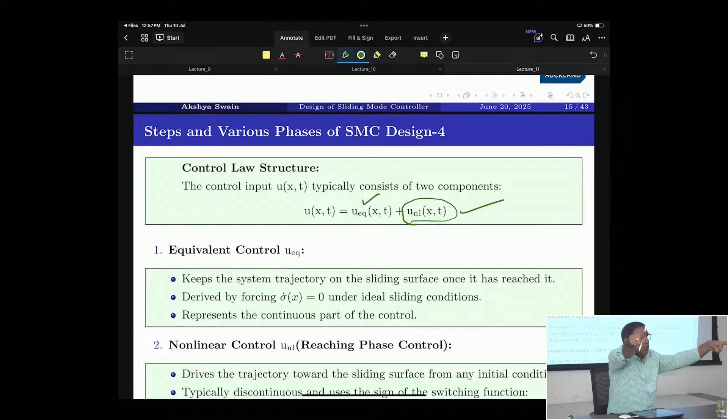If this is the sliding surface, this controller will push you here. If you always oscillate here, the nonlinear controller will always push you back. So that particular switching law component is this one, and when you are here, the controller which is there, that is the equivalent controller.

Yes. No, not always. Yes. Yeah, that's right. Yeah.

The two components: one is equivalent control, which keeps the system trajectory on the sliding surface once it has reached it, derived by forcing sigma dot x equal to 0 under ideal sliding conditions. It represents the continuous part of the control. The other, the nonlinear part, drives the trajectory towards the sliding surface. So if you are just a little bit outside, it will push it in, from any initial condition. It's typically discontinuous and uses the sign of the switching function.

Another thing I want to say: for any switching function, wherever you do switching, there will be switching harmonics, switching transients. So the system might be a linear system, but due to switching it becomes nonlinear. And when it becomes nonlinear, you do not know what sort of frequency it will generate.

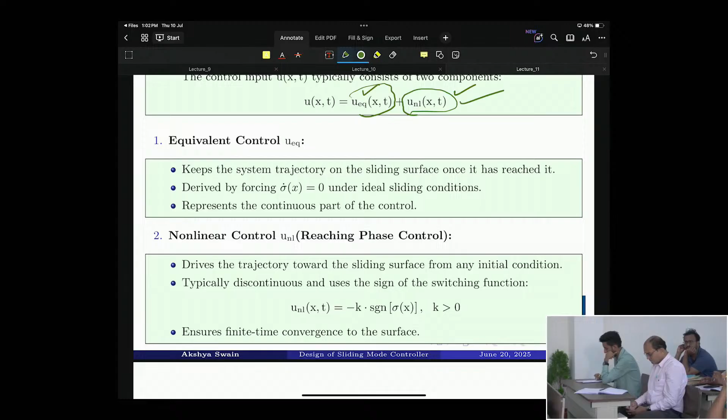The control law has two components. The first component is: once you reach here, inside this room, there must be some facility - a chair, a table to sit. That is the equivalent control law; this part decides that. And there will be some people not used to being in this room, so I'll keep those two people outside - the moment you go a little bit outside, they will push you back in. The theory says - I am not proving it here -

the theory says sliding mode is robust against matched uncertainty. This point I will explain to you. Matched uncertainty - very carefully understand what matched uncertainty means. Not any sort of uncertainty, matched uncertainty. What is matched uncertainty, or matched disturbance, let's say?

If the system is x dot equal to a linear system, let's say x dot is equal to Ax plus Bu - what is the meaning of that? X is the internal variables. Bu - you see here, this is the room, we are all state variables. That door is the B channel; that is through which the input signal comes. The input signal comes from that door, that is the B matrix. U comes through B, through that particular door it comes. All the input signal comes through that door.

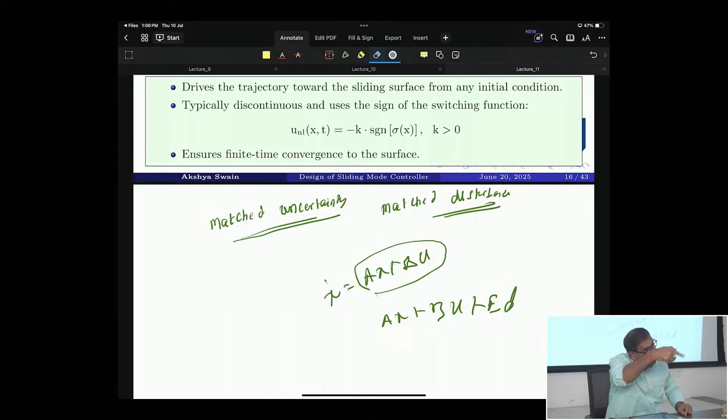That means your input comes in through that door. Suppose you have a house with 3 doors. You come through one door, so any issue coming through the front door you can take care of. If somebody comes from the other side, you cannot take care of it. Matched disturbance and unmatched disturbance.

Matched disturbance means the disturbance comes through the same door where the input is coming, but disturbance can come from other doors also. Got the point? Matched uncertainty means the analogy is clear: the door is the B matrix, and the input is coming through that door.

During the reaching phase, nothing. No, all uncertainty should be matched uncertainty. A plus delta A, X, so it will take care of it. That proof is there in the lecture handouts.

Any questions here? I don't know what is there in today's assignment handouts, but any questions? Is the concept clear? Sliding mode controller, what it does. Okay, once you have sliding mode...

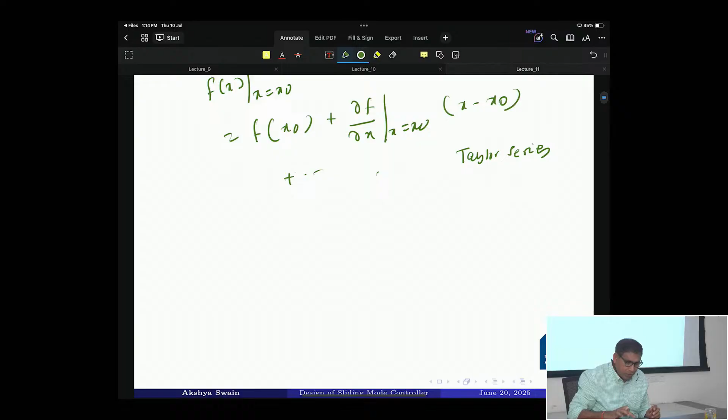Example is here. X dot is equal to ax plus bu plus d(t). The system has a disturbance. Let us define the switching surface sigma(x) is equal to x.

Now you want a control law. It has got two parts. One is the equivalent part, u(t) is equal to one linear part and one nonlinear part. The linear part will ensure that the system is in the sliding surface, and that is computed by making sigma dot equal to 0.

If I make sigma dot equal to 0, ax plus bu is equal to 0. So u is equal to minus a by b into x. Clear? So this is the part, u equivalent is equal to minus a by b times x. That's the first part.

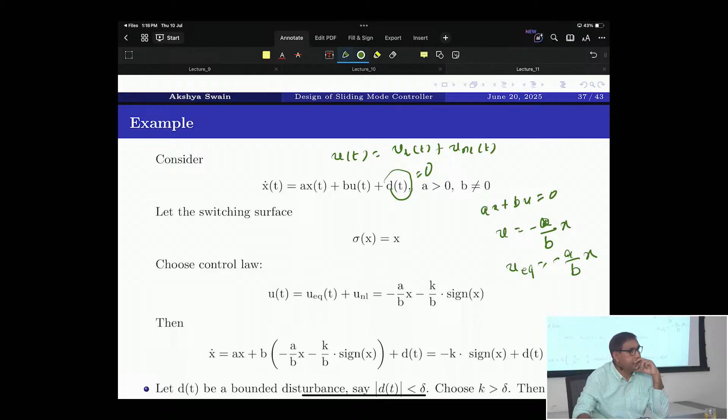This is the control law which will keep the system in the sliding surface. But if the variables go out of the sliding surface, somebody should be there to push them back. That is the nonlinear control law, which will push it; it is not standardized. There are many types of nonlinear control laws. Usually a sign function is used: if x is greater than 0, push it here, if it goes this side, push it this side, if it comes this side, push it that side.

So you see, this is the equivalent part and this is the nonlinear part, and the system is this. You will do an example here. Have I given the example in the program? I think I have given that. Yes. Similarly here, you see.

But that's the problem with the sliding mode controller: because of the switching law, the response will chatter a little bit there. But that's fine. There are thousands of papers on chattering reduction, how to reduce the chattering, those things are there. But the important point is, it is robust. It is robust whenever in the sliding surface.

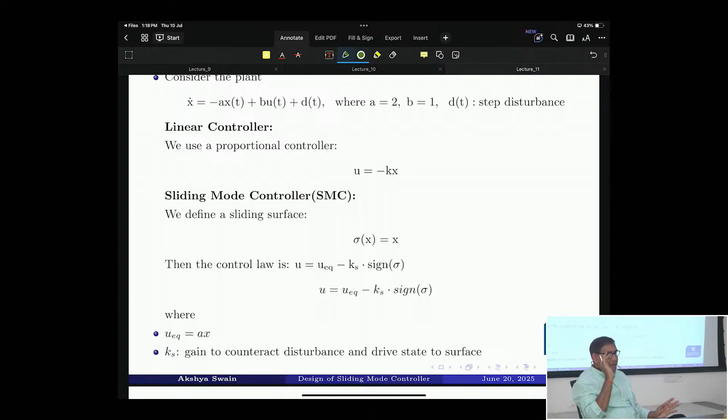Chattering happens because of the nonlinear control law, that's the point. Again, the same analogy, you should understand the concept, always think of the analogy. You are in this surface. Chattering will come because of the nonlinear part of the control law, right?

So that is like one person who wants to go out of the room. The controller will push him. In the normal case, what will you see? He wants to go out, then you will push him, then he will shout or not shout, he will know why you are pushing him. The same system also tells the same thing, it will chatter.

Got the point? I have studied control theory, and what humans behave, the systems behave exactly the same thing. The moment you push him, if you give a large control effort, it will shout more. Hey, why you are doing like this? So the amplitude will go up.

Okay, so chattering, the wording is not the same thing, but there will be chatter, there will be discussion, because the person is standing there, he is trying to go out, he is trying to push him, so there will be dialogue.

Any optimization techniques used for this sliding mode control? No, I have never done it.

We always say try to use very simple controllers. I am against using very complex controllers, because nowadays people combine sliding mode, MPC, PID, and observer all together. Our people are doing it, I am telling you. I am doing it too.

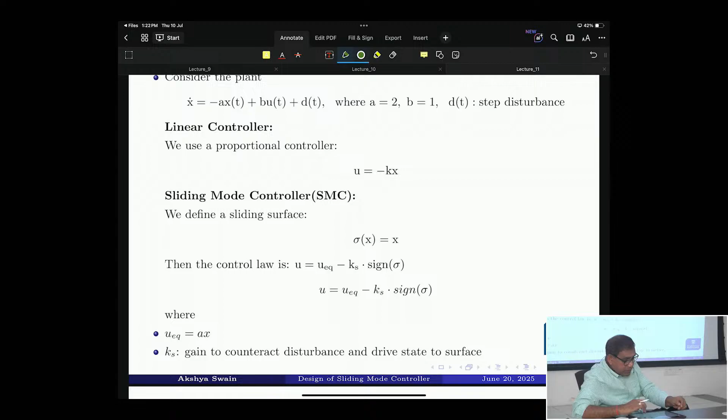One minute. Sigma x is equal to x. So sigma dot, x dot, is less than zero. Only if that condition is satisfied will it happen.

Any other questions?

I couldn't get that.

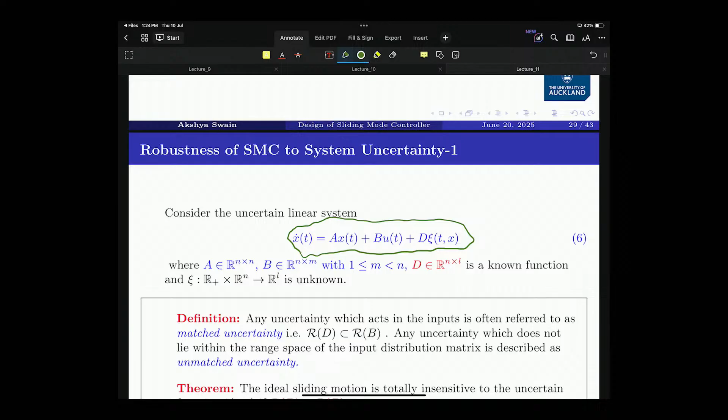No, I understand that. What are you saying is coming? Sliding mode controller has to be designed—it is not a model-free controller. The system has to be represented by a model, either linear or nonlinear.

In this example, I think the assignment has a nonlinear model or something like that. So what you are saying is, how do you model the system as x dot equals Ax plus Bu—is it in this form? So where is the sine wave? In x dot equals Ax plus Bu, what is the sine wave? Is Ax a sine wave?

I couldn't understand how Ax is a sine wave. What is the system matrix?

Yeah, you represent that thing in state space, then only you can apply these things. So how do you model that inverter in state space? What is that A matrix? Yes, that's the point.